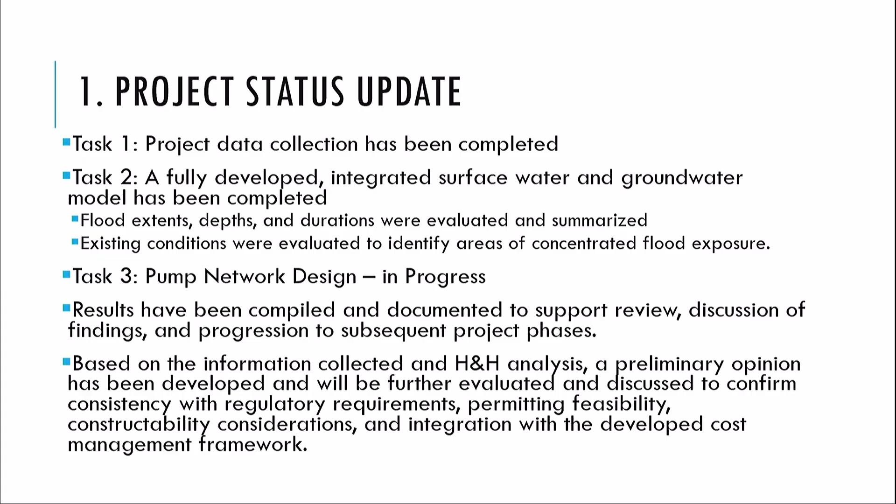With this, I'm going to the next slide. As the manager mentioned, we started in October. We have been two and a half months in development. We had preliminary information, and our team has worked before, so this gave us a head start.

As the village manager mentioned, we had a meeting with the council members and the ad hoc committee on December 15, where we provided the initial ideas. So this presentation is based on that meeting, and also includes some additional work we have done since December 15 looking into the groundwater impacts if we are to inject into the ground.

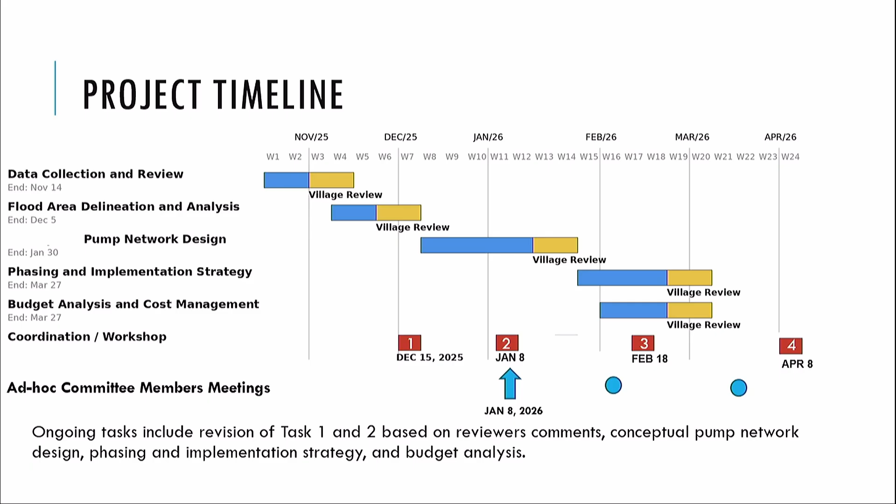This will require permitting from FDEP and also from the county. That definitely needs to be addressed, and I think it's a critical aspect because it determines the feasibility of the project, specifically the amount of water that can be injected into the ground and how much we can reduce the water that needs to be conveyed to the outfalls.

Just to give you an idea of the extent of the model, the coverage is approximately 1,000 acres, and you can see all the nodes, pipes, catch basins and manholes that were implemented. It is a complete replica of the existing system as far as we have information provided to us. We used the most recent surveys by KCI, previous surveys done by other teams, and the existing GIS database of the village. This includes the size of the pipes, the inverts of the catch basins and manholes, and we have approximately 1,500 nodes and 1,500 pipe sections representing the system.

One of the reasons we consider this level of detail needed is the topography of the village. Even though we call it flat, when it comes to flooding, it is not really flat. There are local depressions, and the catch basins have limited influence, which led us to decide we need a detailed representation of the system.

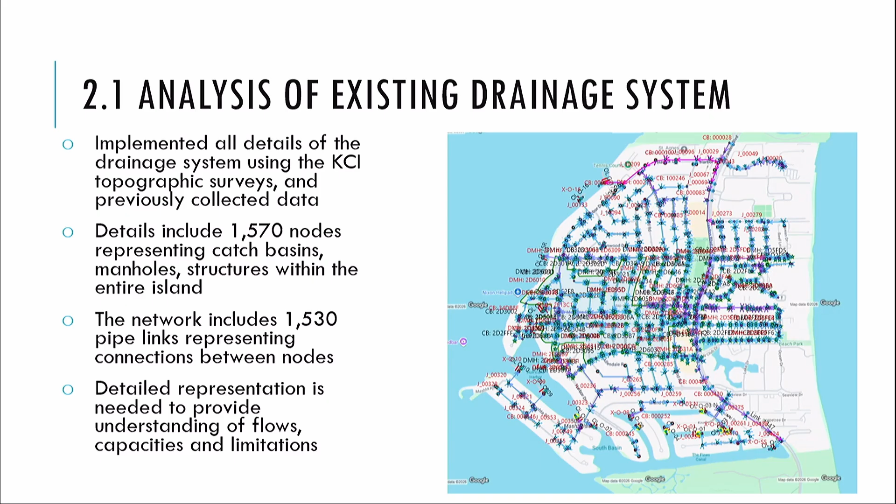If we want to analyze the deficiencies and propose upgrades to the system, we needed this level of detail. Currently in the model we can go to a catch basin and show the hydrograph of what is entering it. Some catch basins have very little inflow, some take more. This detailed data will help with final decisions, and especially when we go to design, we will be able to provide good direction.

If we're doing upgrades to the pipes, we can recommend specific pipe sizes. Also, the catch basins should be placed in specific locations in order to increase efficiency.

A little bit about Zone 1, which is right here. This is the outline of Zone 1. The blue line represents the entire model, and you can see it extends to the coastal area. This is needed in order to reflect the tidal impacts on the system. All of the outfalls are connected to the tide, but not only that, the groundwater is also influenced strongly by the tide, fluctuating on the same timescale.

One aspect of this is that it changes the amount of subsurface storage periodically, every 23 hours or so, and it also changes the direction of the flow, either towards the center of the island or outside. Within Zone 1, we have identified 73 manholes and 170 catch basins.

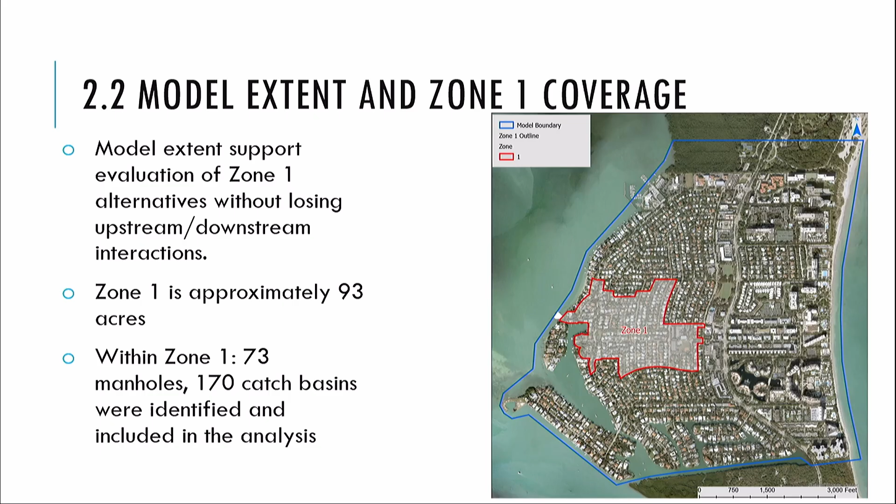They were included in the analysis. Here are the tidal conditions, as this is from simulation. The simulation is based on a detailed groundwater model, which is integrated with the flow system. That's one of the differences. The groundwater model goes through the entire surficial aquifer, approximately 150 feet below the surface.

Considering that the injection wells we would be proposing are not deep injection wells in the Floridan aquifer, they're injection wells in the Biscayne aquifer, more accurately the surficial aquifer. The surficial aquifer is discretized into 5 layers, and the injection wells are at the 5th layer. So when the stormwater is injected, it goes to the 5th layer, which is accepted in many locations, and it's injected into the saline zone where there is more than 10,000 ppm salinity, so this is accepted by FDEP and by regulators.

And as you can see on this image, I wanted to show you - I don't know if this works. How does it work? Where is it? It's on the side.

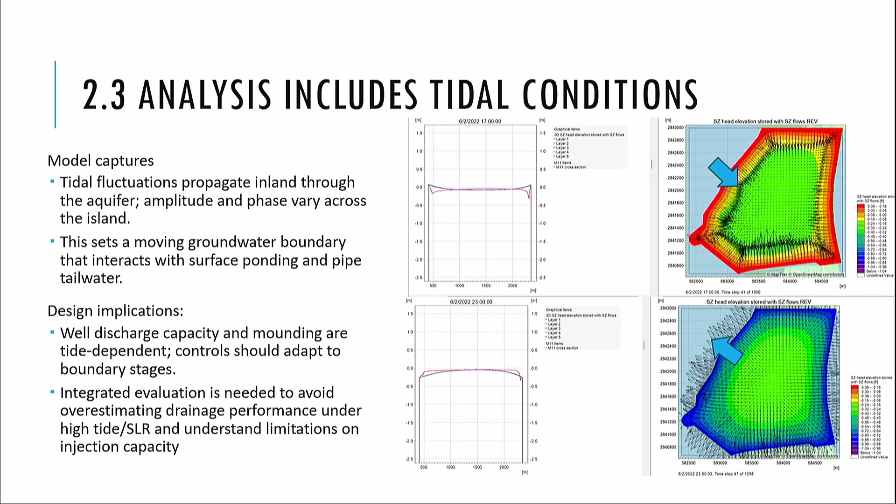For us it was very important to include the effect of the groundwater. These lines shown here show how the water level - this is a transect through the island - shows how it goes up and down. The movement is approximately 1 foot in terms of the groundwater. The tidal moves 2 feet, but inside, the movement is limited to 1 foot. So that gives you understanding of how these are related.

There is the amount of infiltration that occurs in the ground, and this is accounted for, transitioning from the surface through the unsaturated zone vertically to the groundwater. This is reflected. We also included vegetation in this, and evapotranspiration, which in the short term is less efficient for flood management, but in the long term it's a very critical element, because vegetation is one of the most efficient pumps to take water from the ground and send it into the air.

For long-term sustainability of the island, vegetation is very critical. The roots are taking water from the ground and expelling it into the air, and that process is non-stop, continuous. So all of these aspects are included, and they're integrated together with the catch basins and all the details of the infrastructure.

Now we will discuss the design criteria and the level of service. The design criteria and level of service were part of the request - the RFQ, request for qualifications - for this work, and they were stated as design year 2050. That's the planning horizon, which means approximately 25 years from now.

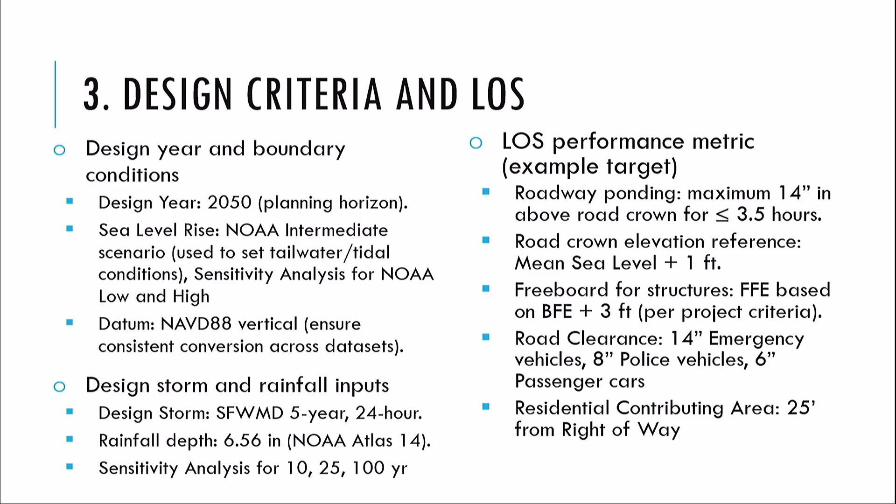In terms of the tidal boundaries, we mentioned that we are using NOAA intermediate, which is at plus 0.75 feet increase of the tidal. Additional sensitivity analysis are applied for plus 0.6 feet and plus 0.9 feet for high, to represent the NOAA low and high scenarios.

On the right up top slide, we are providing the historical data, so you can see there is some sea level rise increase throughout time. On the lower right image, we are also providing additional data.

The curves that have been developed, we downloaded from NOAA. The blue line is our line that we just put in the middle of the points, which represent the mean sea level for the year.

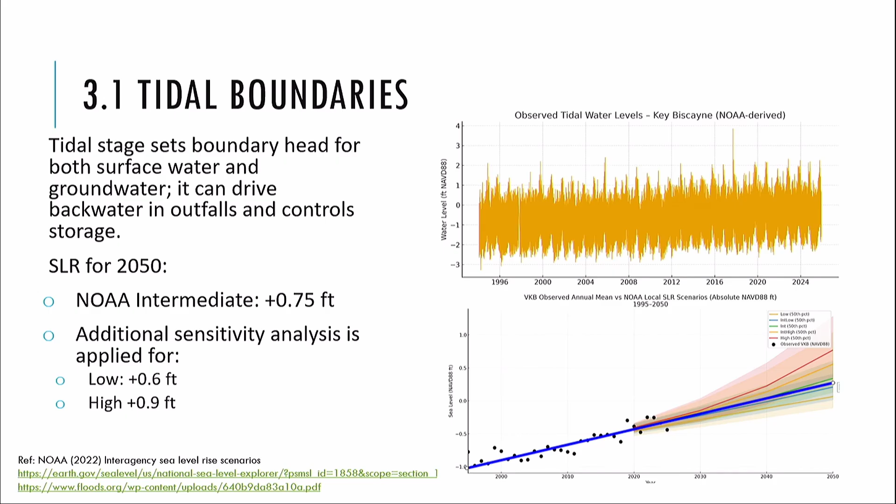So each of these 30 years, we have a data point, a single data point, and you can see the blue line shows where it goes. It actually pretty much follows the NOAA intermediate low if we assume a straight line, but we do not know if it's going to be a straight line or exponential. This is only for illustrative purposes.

Here was an important question brought by Council Member Vasquez: what is the rainfall curves that we're using?

We are providing comparison between the 5-year design with 6.56 inches, the 10-year design with 7.93 inches, the Irma existing storm that occurred in 2017 and is typically used throughout South Florida to do calibration, and also an extreme event that occurred in June 2022.

We also know there is another extreme event that occurred in September, which was detailed by the village, with detailed measurements of depth and extent of the flooding. So we are comparing against that.

The extreme event that occurred in June totaled 12.82 inches, which is almost equivalent to between a 25 and 50 year storm. I also wanted to mention that you are probably aware we talk about a 1,000-year storm that is supposed to occur once in 1,000 years.

But these storms occurred twice, one in Fort Lauderdale a couple of years ago, and one in Homestead, though it was in the parks so it wasn't really noticed, but they exceeded the 1,000-year storm, which is approximately 27 inches of rain over 3 days.

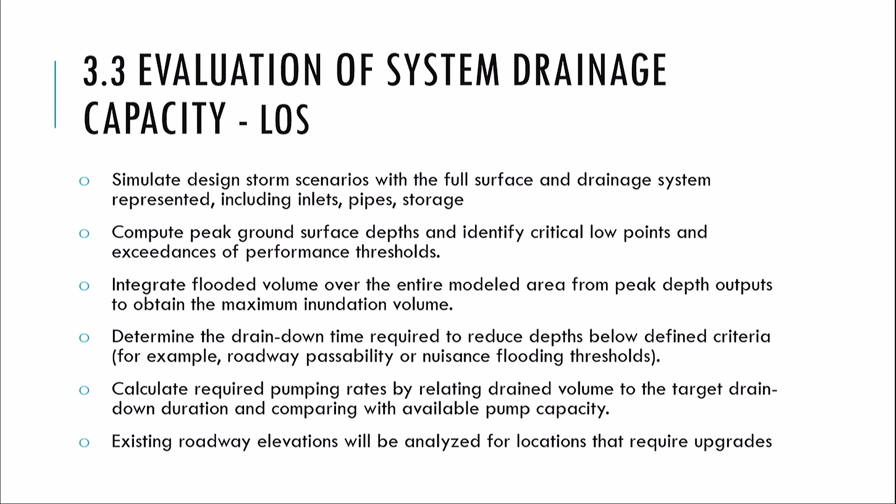And once we calculate the pumping rate, we do comparisons, and then we also look at the duration of the flooding above the roadway. So there are a number of steps involved in this.

This table represents the system drainage capacity. The level of service, what we determined from our analysis, is if we take the entire volume of water above the ground, because when the rainfall starts it basically continues for 3, 4, 5 hours. We're talking about synthetic rainfall. During this time, water distributes in the lowest spots, a minor portion infiltrates, so there is a distribution onto the area.

And we determined that for Zone 1, this table is important because it provides our targeted values. Zone 1 has 93.72 acres. Total rainfall is 6.56 inches. The rainfall volume, expressed in typical hydrologic units, is 51.23 acre feet. And that's the rainfall volume.

What we have measured, simulated actually, the excess volume on the ground is 21.70 acre feet. If you want to convert it to cubic feet, you multiply by 43,560, and you get nearly 1 million cubic feet on the ground. In order to remove these 1 million cubic feet under perfect conditions, and I think that's also very critical, if you place a pump to remove this amount over 4 hours, this pump will need to be 65.6 CFS. That's the capacity, so we consider this to be the drainage capacity.

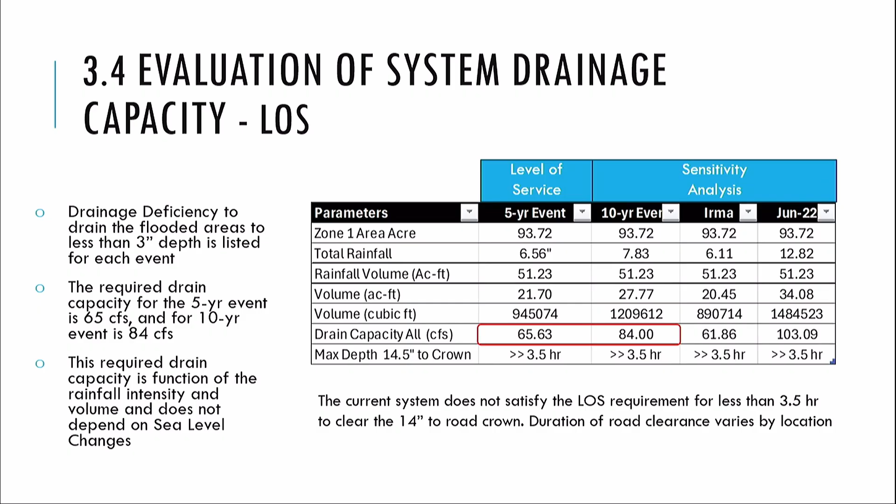I think that's a number we can rely on, that we need to drain 42% out of the entire amount. As you go further with a higher event, the 42% starts decreasing because of the efficiency of the system. You cannot remove more, it has certain capacity limitations, but that's something we'll also provide as a summary.

In terms of the peak outfall discharges, when we do the analysis we look at the peak hydrographs, how they develop at the tidal section, at the tidal point. We have 15, a little more than 15 outfalls, even though they're named 1 through 17, there are slightly more.

Zone 1 is managed by approximately 6. We also know these are currently in the model, but we also know some of these are not operating as needed.

So you can still see that the current system through the outfall, even if we assume they operate properly, it will be 15 to 16 CFS. So there is a deficiency of 50 CFS if we can still rely on this.

This is the actual existing condition, and I believe we have data that previous management recorded approximately 4 or 5 CFS at certain outfalls. Again, this is not really very significant to relieve the flooding.

It isn't very well stated, but it's important to have those outfalls, to understand what condition they're in. Do we know what condition those outfalls are in?

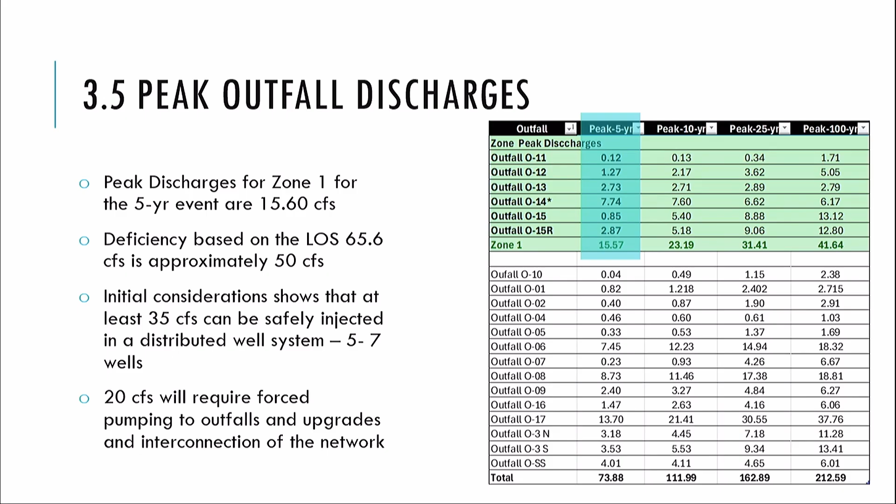The message, I guess from my perspective, would be to retain outfalls at all times in their best conditions. They are precious to us because we don't have access. They can always be expanded if need be, not for this design but for the future, and we need to understand what their capacity really is. Stop using atlases to determine it, because we could maximize the utilization. That's a few million dollars we could save, right? So it doesn't cost that much. What is it, 120,000 to figure out area 1? Let's do that. Let's not just do area 1, let's do the outfalls, let's figure it out.

Yeah, this is one of the most important features you have, the outfalls. Yes, of course, because that's a clear discharge, and we have the easement. The easement is even more important because, relatively speaking, upgrading an outfall is a low-cost approach. You'd be surprised the arguments people make, that it was a dead outfall, nobody's using it, so I was able to build on top of that. I know, we could always take the property back, but...

George, a real stupid question. If we did nothing, as of today, with the existing manholes and drainage systems we have, and the existing outfalls we have, without the pressurized injection wells, without pressurizing outfalls, what level of service do we have? How many more inches of rain can we handle to reach this 14-inch level of service we're talking about? We're talking about Irma, the 5-inch, the 5-year, the 10-year storm. What percentage of that can we achieve by doing nothing? In other words, what functions today is the marginal thing which will take us from that point to this design criteria. Do you have any idea, or can you calculate that and come back to the next meeting with it?

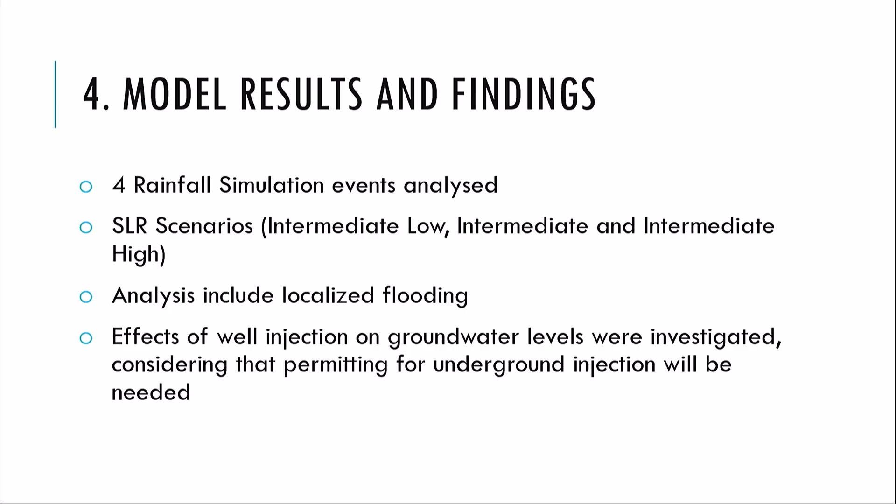I'll give you an example: in Miami-Dade County, by having this detailed model with detailed analysis, the county went to category 3, which is one of the highest rated in the U.S. The analysis includes the localized flooding and also the effect of well injection on groundwater levels. I think that's very important.

These are the four events we are currently focusing on. The purpose of including Hurricane Irma is to test the tidal surge and the groundwater response—the key driver is the high coastal stage, again 3.54 feet, which is very high. For June 2022, we have rainfall-driven flooding entirely from the rainfall; there was massive flooding based on the large amounts of rainfall volume.

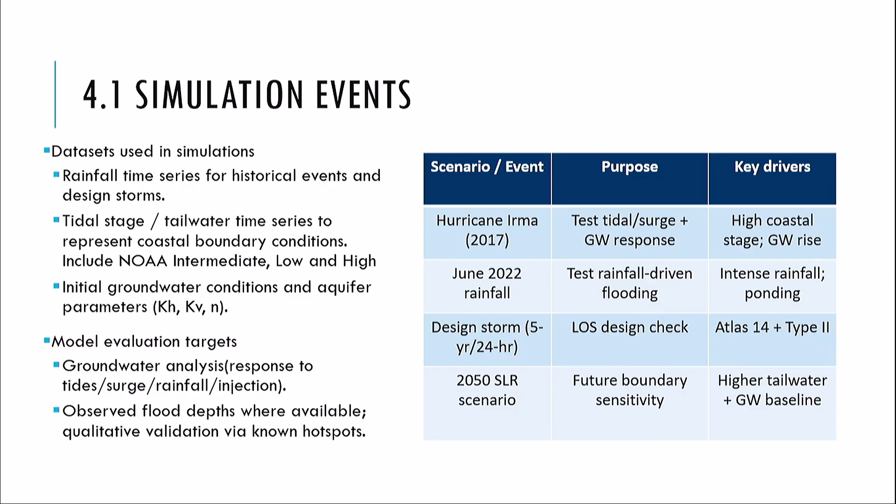The design storm is the level of service design check, based on NOAA's Atlas. The 2050 sea level rise scenario includes the design storm for 5 years, and also the future, to test the future boundary sensitivity in terms of tidal increases and changes. Is it the same slide? Yeah, so we'll skip it.

Here is an example of how the tidal levels were changing. Again, this is not the tidal level, but the groundwater at the school—the groundwater went all the way up to 1 foot.

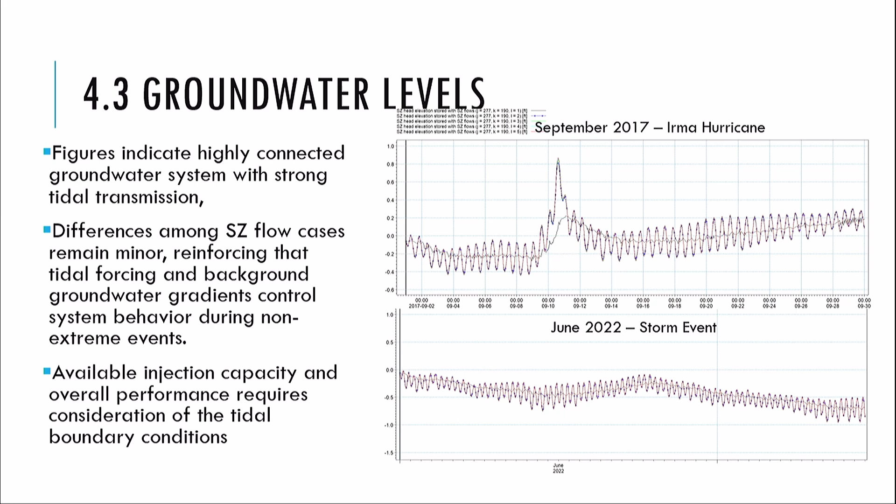We have done the preliminary analysis for mounding, and we came up with a number of 35 CFS. 35 CFS can be injected within this area without potentially increasing the groundwater to a level that would not be permittable.

Now we are scheduling meetings with FDEP and with the county to ensure the feasibility of this. Based on the preliminary results of the groundwater analysis, FDEP allows a groundwater model to be used for regulatory purposes to show that this will not endanger adjacent water resources or cause any additional flooding.

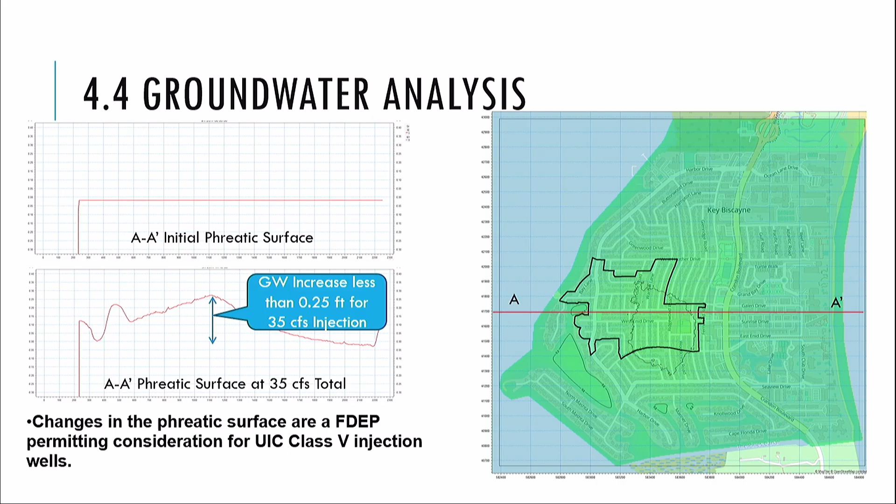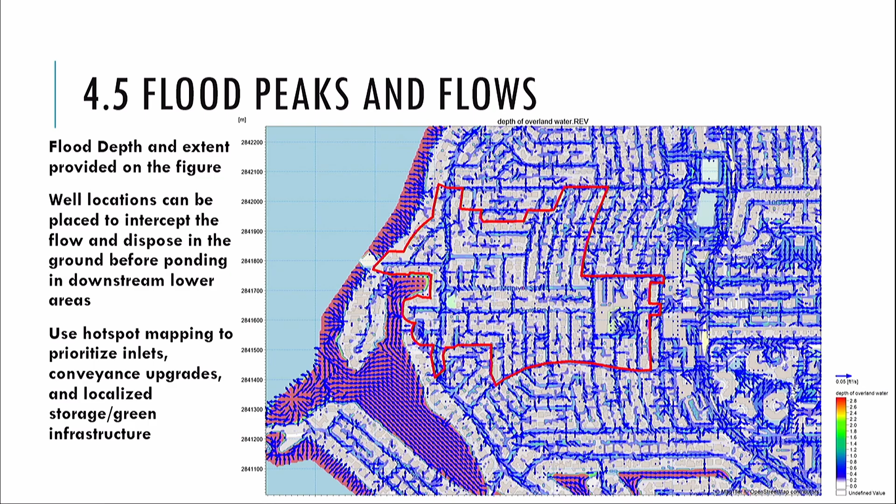The feasibility of future systems is important to discuss. We think it's critical for every project to discuss green infrastructure solutions. Green infrastructure is for very low intensity events. It maintains healthy vegetation and is able to store water locally. This is important for the sustainability and resiliency of the island because it involves vegetation and water quality.

The pressurized groundwater wells—we're considering up to 35 CFS of injection. We're currently looking into different aspects of that, possibly locations of the wells. We showed potential wells during the first presentation, but these could be optimized. We're also considering pump stations with force mains to the outfalls, to have up to 30 CFS conveyed to the outfalls.

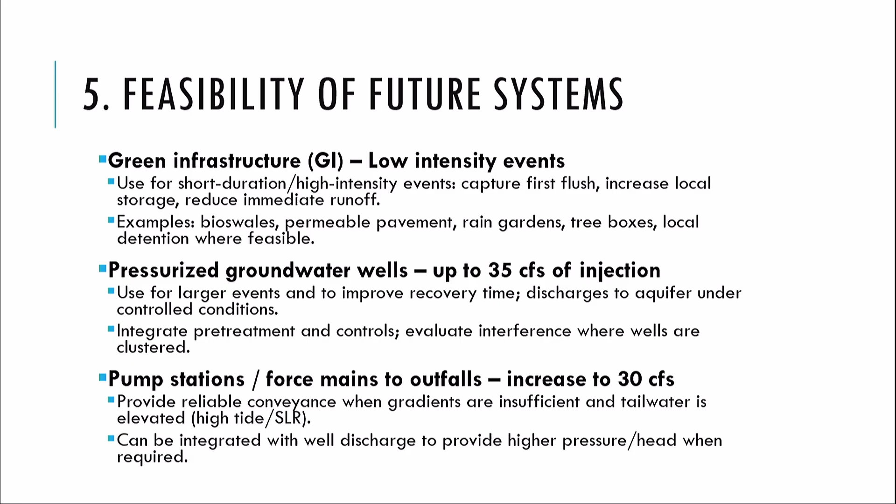One positive aspect is that if we're able to first use green infrastructure to treat some of the flows, then we can use the pressurized groundwater wells to have the first flush go underground, since it's also treated. Then the outfall discharges can be simplified, and you may not need dissipation structures because the velocities would be less. Also, we're not considering pipes larger than 24 to 30 inches, which results in cost reduction and ensures sufficient high velocity to avoid sedimentation within the pipes—this is one of the problems with large gravity drainage pipes.

I wanted to mention also the low areas. You can see all the roads are in very low areas, and these are pretty much flooded. This is a challenge for the crown of road conditions. So definitely additional capacity is needed to satisfy the condition of less than 14 inches.

Giorgio, if I could interrupt—what conditions lead to this state right here? What has to happen to get us to that?

So this only highlights the topography where it's less than 3 feet. This coincides with the flooded areas and also coincides with the problems for having a level of service of less than 14 inches for less than 3.5 hours. So these areas typically get flooded and stay that way for a long time. This needs to be resolved.

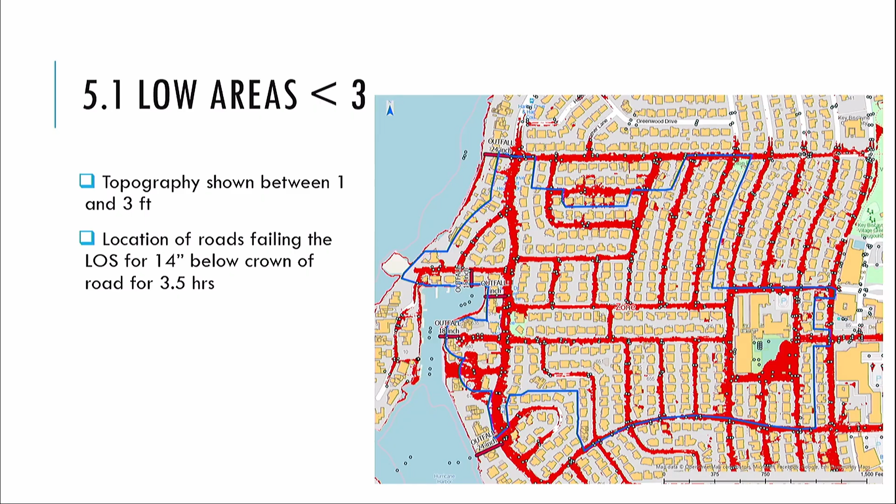This is only topography—we know where it floods, but I was wondering what gets us to this point. So you're just showing topography. Just topography, and for another illustration I'm showing the topography. So these are really the areas that are critical, and it seems that all areas are critical where you have streets.

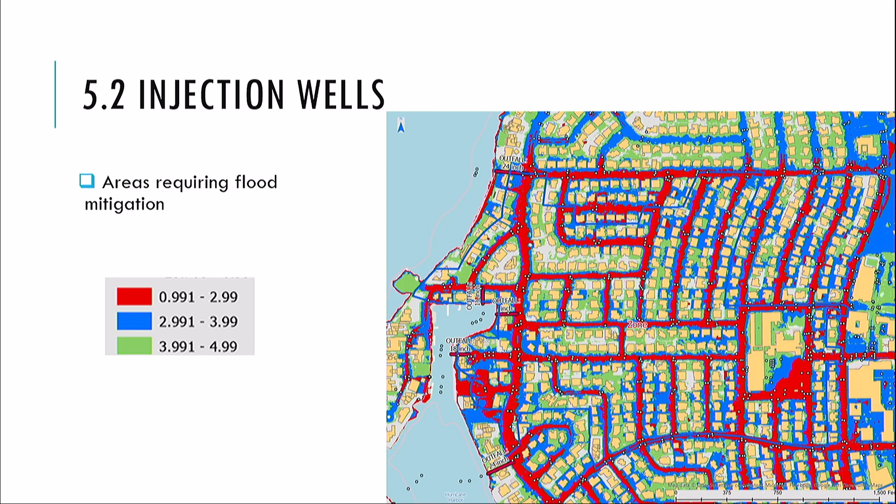This also brings a question about possible upgrades of the streets. The previous plans were considering up to 3.15 inches in some different locations, so that's something we would be able to simulate the effects of. If you're upgrading the drainage system, it's probably reasonable at that point to raise some of these lower roads, if you'd like to consider that.

Are you speaking of a new piping system, or is it just connecting and manifolding with the existing system? Connecting and manifolding—more the reason why we want to know the condition of those pipes. Yes, right, perhaps.

But to be clear, when we see a lot of pipe there, a lot of pipe means a lot of cost. So you're not really showing a perimeter pipe—you're showing connections at discrete locations, so you have a connection all throughout. Is that a fair statement? That's absolutely correct, yes. Okay, just wanted to make sure everybody knew it wasn't a massive pipe to build throughout—you're just connecting, but we want to know what those existing pipes are.

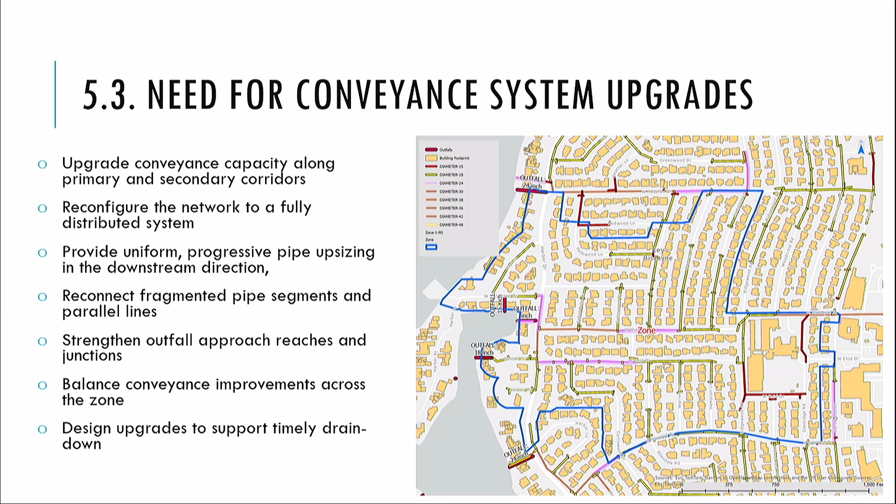You have the majority already placed in the ground, so based on the estimate of this, you need another 30% additional, if you want to see the impact of reconnecting everything. The outfalls should be maximized as well, how much you would discharge. This again goes through reconfiguring and reconnecting the network. So that's suggestion number one.

The other one is, once we have the effect of this, to look at the pressurized groundwater injection wells, because they provide a localized solution to treat the water where it falls, instead of trying to convey it through conveyance. And it doesn't make it easier, because all these catch basins are reconnected, so all the connections have to be reconfigured in a way that within this area of influence of the well, we need to make sure the water flows towards the well. So there's quite a bit of efficiencies, or optimization, that needs to be done.

Also the pump stations will be having a dual action. We discussed that, thanks to the team, they had a very good suggestion in terms of reduction of maintenance, improving reliability, reducing risks. So if we have a pump station, we can also pump to the outfalls. Pumping to the outfalls is beneficial because you'll be using smaller pipes, smaller conveyance. So that's number one, you have a proper velocity in the pipes, and it's controllable.

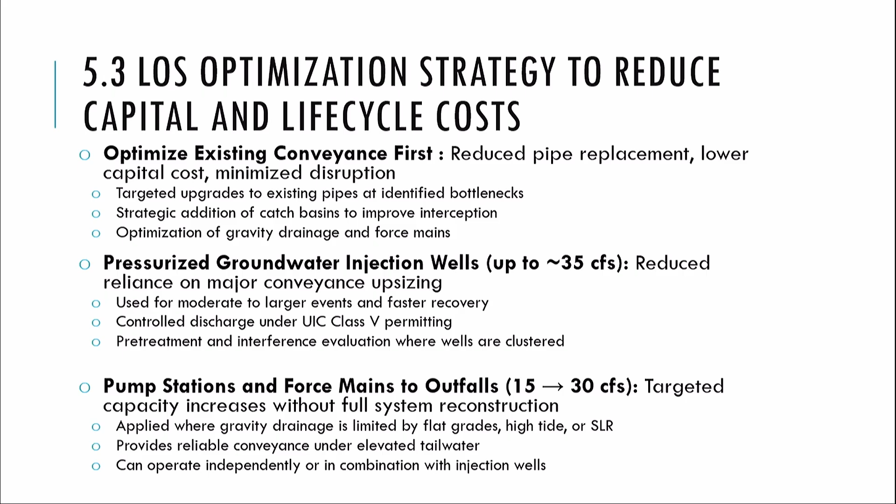So these are the steps that we're proposing. So from what I hear you saying, Giorgio, is this is not all at once, this is a gradual progression over time, and we're not there yet. You know, this is the next meeting, but I'm kind of setting the conditions for that.

You would be able to estimate where we are in terms of requirement, and then fulfilling that requirement, and what level of service we can meet as we go through each one of these steps. I assume. Yes, that's correct. True. So we will be. We actually, that's what we're doing right now.

We're after we developed the model, we have been doing lots of different simulations, and because this is an activity that requires some time, and also reviewing the data adjustments throughout the process to make sure everything is correct. So the next thing is to have these completed.

We're doing this as a matter of fact, as we discussed today. We're not ready with it, but we're connecting the system. We're adding artificial links with certain diameters, and we're looking at how to perform. So we may be changing the diameter. There's a number of things that we call optimization.

Once we're done, we will have a more clear understanding, hopefully for our next meeting. Meanwhile, we'll be working with the team to be aware of things and to receive feedback on how things look, and whether it's performing properly, or underperforming, just to get to the optimized solution that we can propose after testing all different scenarios. So that's the purpose, to have this done for the next meeting, which is on the 18th.

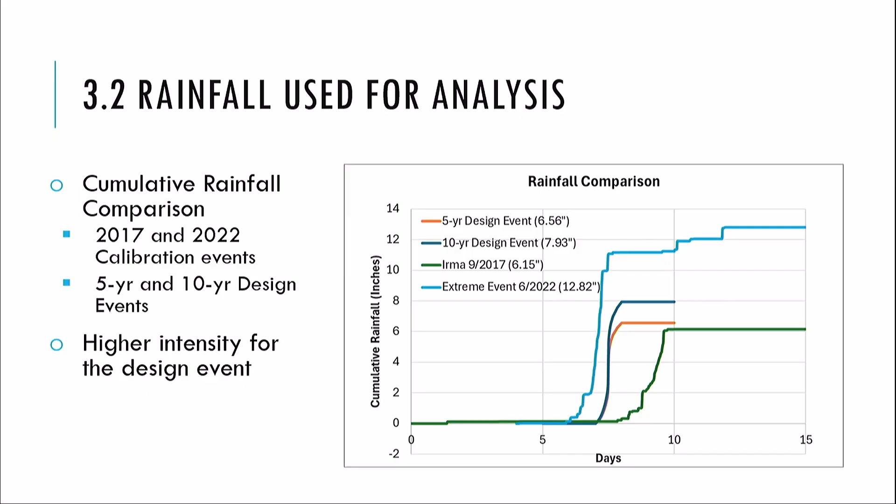That's a very good question. That's part of the level of service. Different municipalities have different conditions. In our case, the level of service is 14 inches for 3.5 hours. But that doesn't mean we have to stop -- the purpose is to resolve within 3.5 hours to be able to have a passable vehicle. So that's really the level of service, and that's what we have. But that's something we can look into, because if we assume a longer duration, then the pumping needs will decrease, but the level of service will suffer. So there is this approach.

And the second question -- on the report, you mentioned the Richards equation for MODFLOW, right? I think there's a typo in the report, a plus instead of a minus, but you also have a sink element there. The sink is only for uptake consumption, but if using the injection wells, that sink element will change. How does the model program you're using consider the injection wells in that calculation? So the injection wells, we're injecting into the deep zone. It's fully saturated, so it's not affected. The only thing that would be affected is the unsaturated zone, which is at the surface.